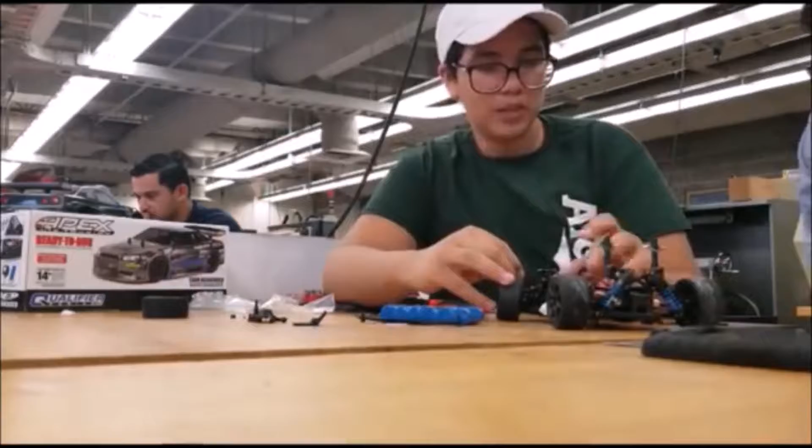Hello, our team composed of Melanie Martinez, Kevin Martinez, and Martin Galicia got the task to design a car using the 3D software Creo Parametric. To complete the project, we went through three main stages: reverse engineering, where we disassembled a physical car that was given to us; the analysis, where we identified the purpose for all the pieces; and the design of the final 3D car.

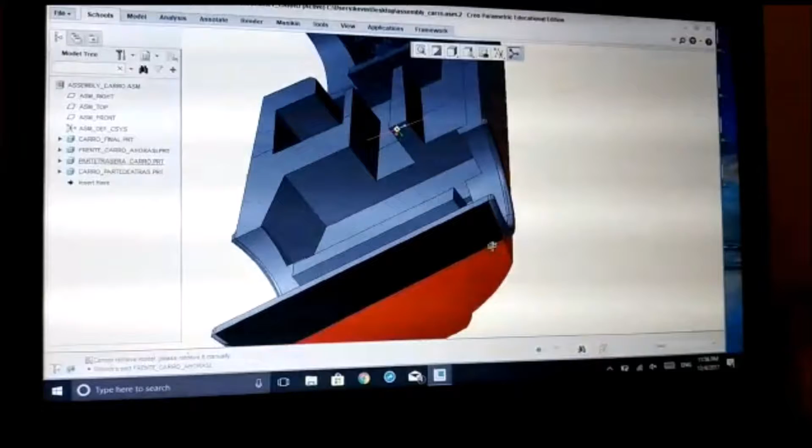This was a challenging project since we went through many obstacles, but in the end we overcame them and developed various skills. The purpose of this project was to design a body for a radio control car that was provided. This new body should be based on the way Local Motors designed the Strati, which was the first 3D printed car to be fully functional.

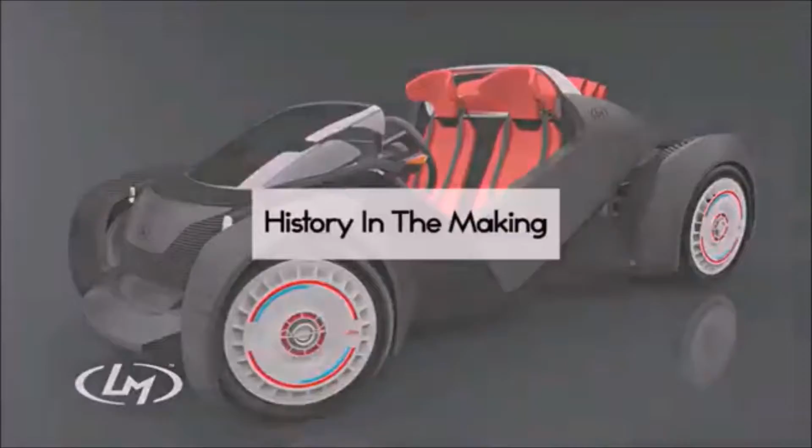Sticking to the concept, we designed a body that could hold all the components without the need of a chassis to hold everything in place. The design was later sectioned in order to be 3D printed, as the dimensions were too big for the printers that we had available.

Reverse engineering is the process in which a product is disassembled in order to understand its components and the way it works, in order to solve an issue or just improve the product. We approached this by disassembling the car starting with the rear side to finish with the front.

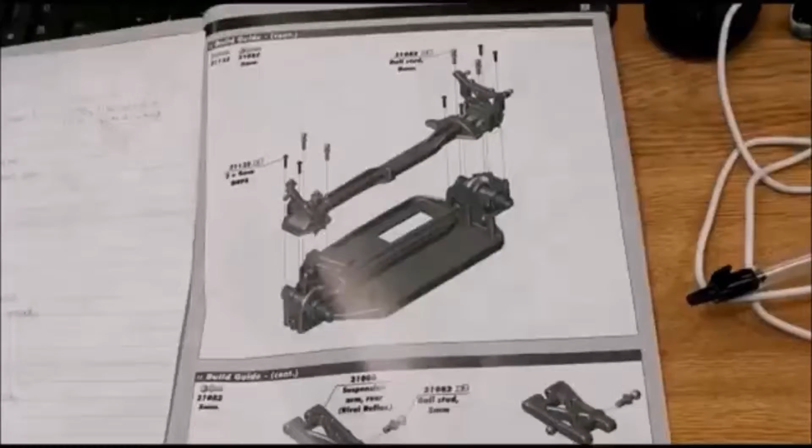We measured all pieces using a vernier caliper and divided them so every member could do a 3D design of it. Once we had all measurements, we analyzed each piece to determine their function and if we needed them for our final design.

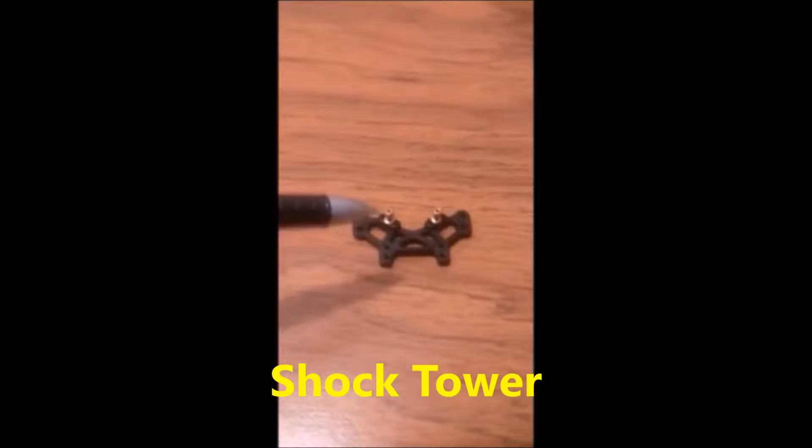The shock tower's function is to support the components of the transmission in place. This piece was designed in order to hold most of the transmission's components, as well as to hold a body mount that was later on used to secure the cover of the car.

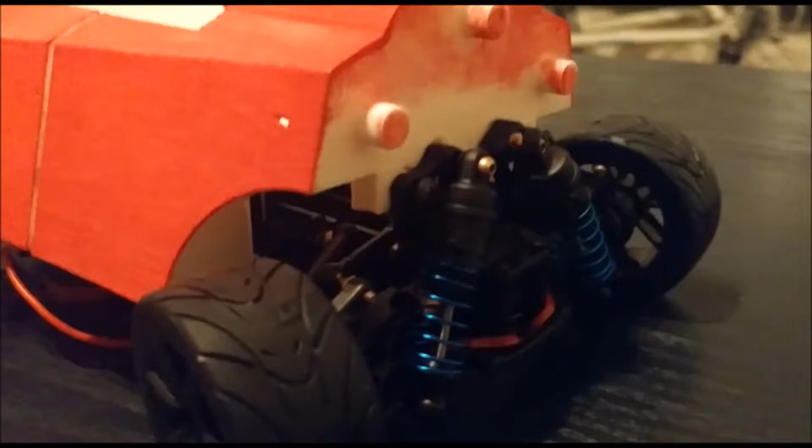As we redesigned the cover, we realized that this piece would be the key to hold all the components into our new cover design. This is why we used this piece as a reference by creating a cutout in Creo Parametric in order to place the holes needed to screw the piece into the body.

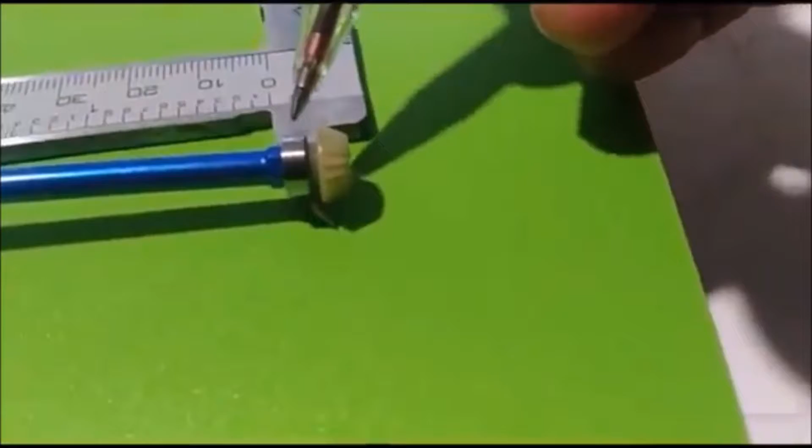The shaft is the piece in charge of giving the mobility to both the frontal and rear suspension. This piece contains a set of gears and bearings that connect directly into the motor and then into the differential. Due to these gears, the impulse needed to move the car is created.

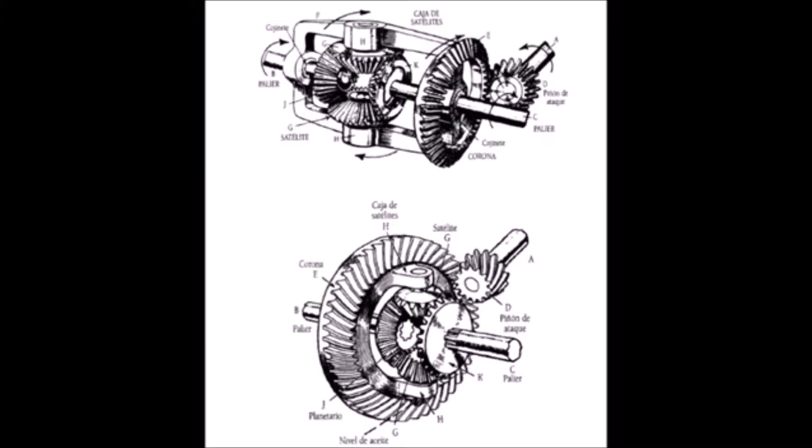The differential is a device that splits the engine torque two ways, allowing each output to spin at a different speed. The differential is found on all modern cars and trucks, and also in many all-wheel drive vehicles. These all-wheel drive vehicles need a differential between each set of drive wheels, and they need one between the front and the back wheels as well, because the front wheels travel a different distance through a turn than the rear wheels.

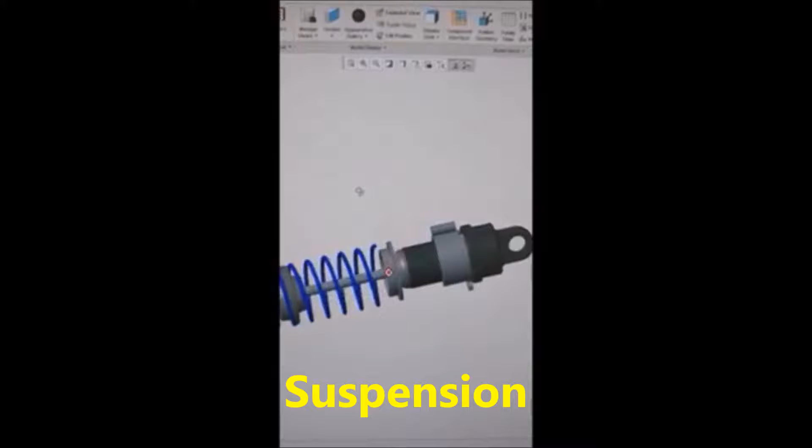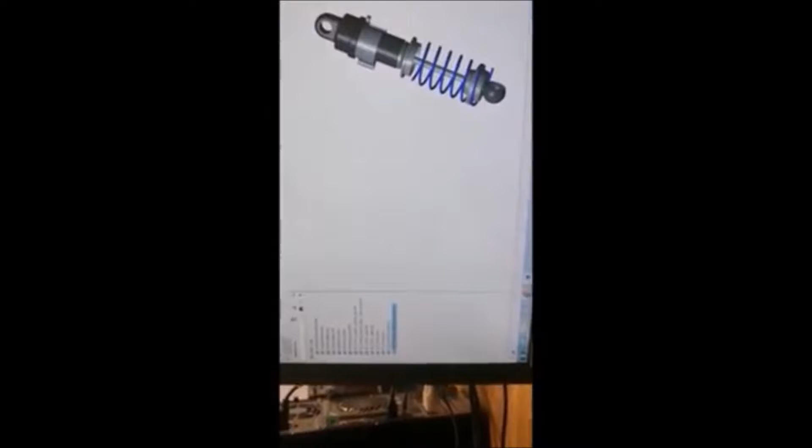The suspension is a crucial part of any car. It helps the car to keep the equilibrium once in movement and gives it stability when turning. The suspension is composed of different parts such as the spring, which makes it possible for the suspension to contract and expand once the car passes through uneven roads.

It also has the lower spring retainer, which prevents the spring from separating. The suspension contains a piston and special shock fluid to help it move. All of these pieces are essential and they must stay in the final design.

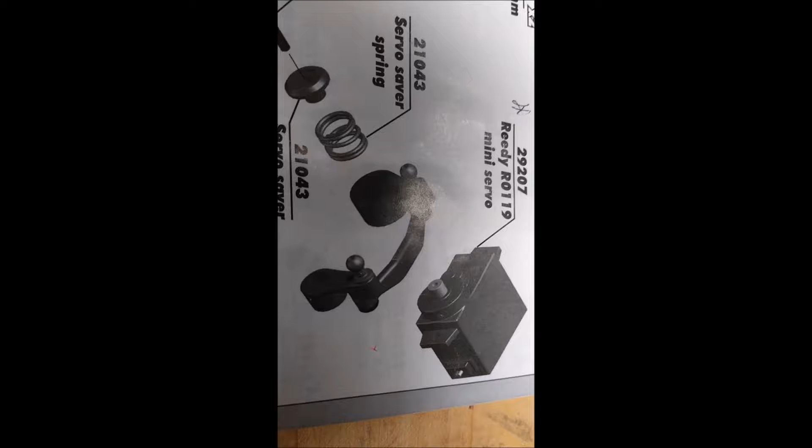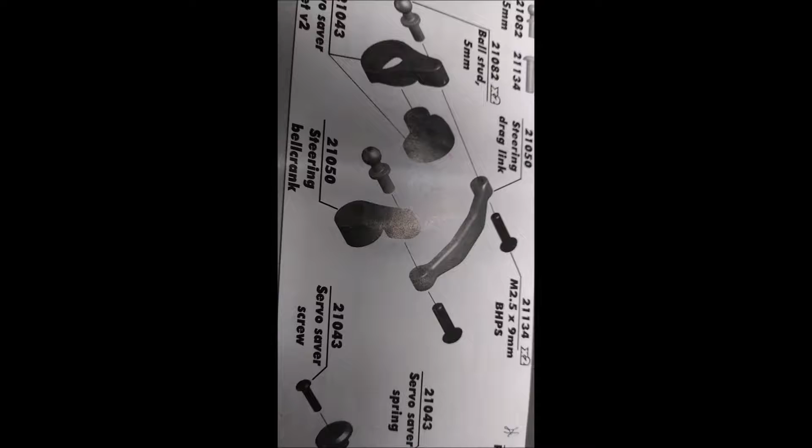The servo increases the steering response of the Apex car. It is designed to create a 180 degree movement. This creates the steering movement of the wheels by using a dog bone to connect the servo and the transmission. To maintain the original functionality of the part, the servo was used in the design of our car.

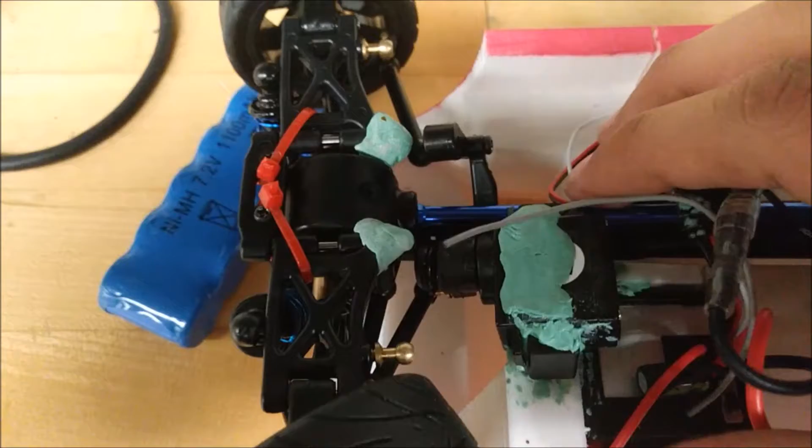The servo used in the car was designed as a smaller scale steering mechanism. It covers the same function as in a real car. The design of it was to be similar to the real one, in a cheap and resistant presentation.

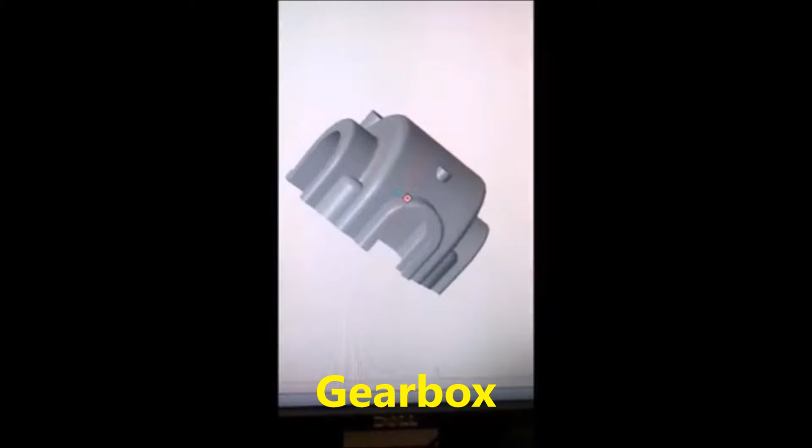The gearbox protects the differential and the gears of the shaft. In a real car the function is the same. It protects the gears, which are selected by a system of rods and levers operated by the gear lever.

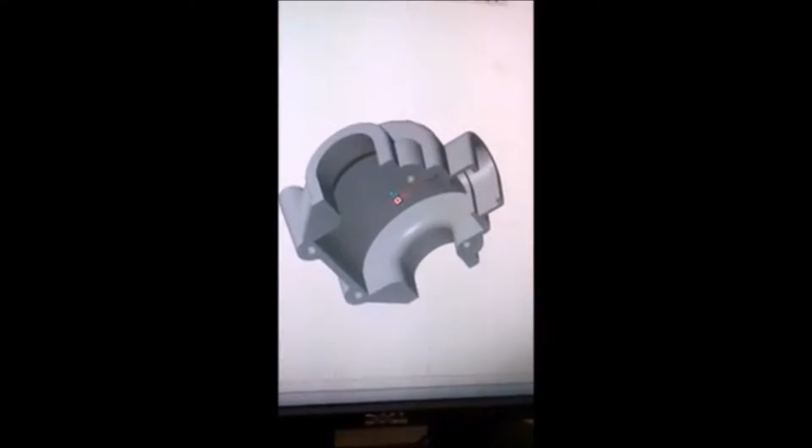Due to the components inside the gearbox, the speed and torque move from a rotating power source to another device.

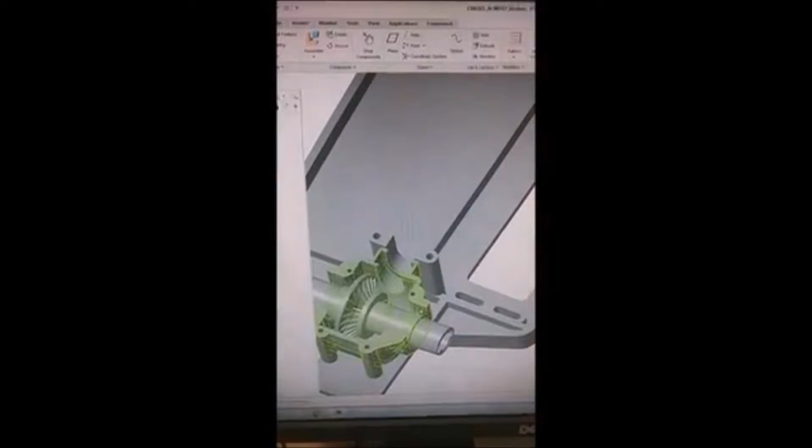The chassis is a big platform used to hold all the pieces inside the car. It is big enough to hold the battery and the servo, as well as the shaft, gearboxes, and the electric wiring. Since our design is made from cutouts on the bottom, the chassis will not be needed. Therefore, its 3D design can be skipped.

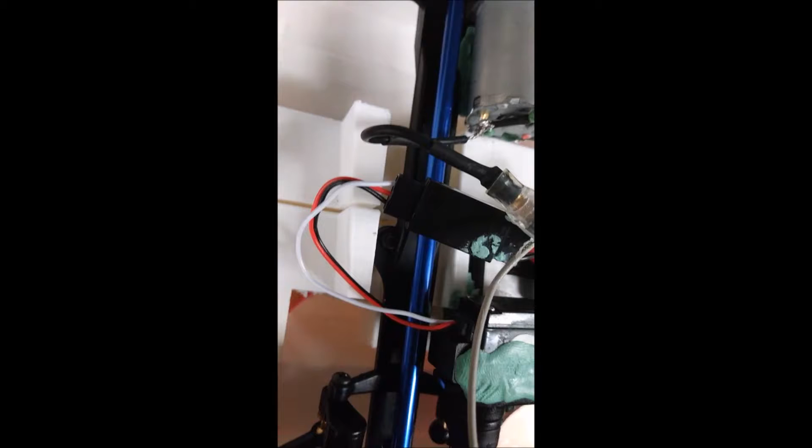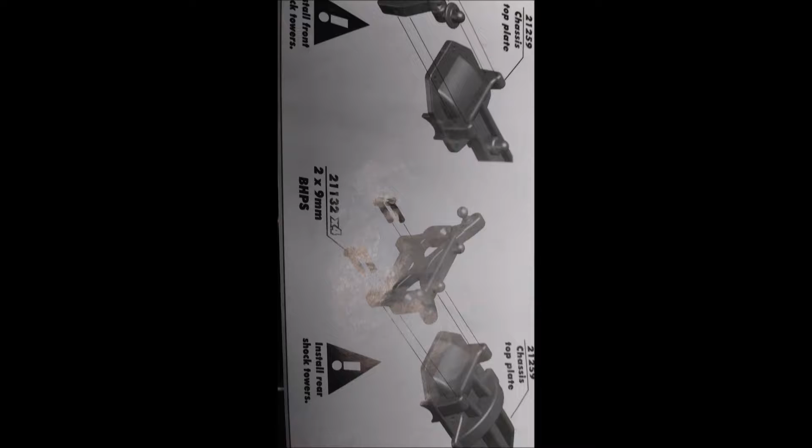The chassis top plate is the component in charge of protecting the most important systems of our Apex car. These systems are the shaft, the differentials, and the motor. In addition to its protection purpose, this component is used to attach the shock towers and the gearbox into an assembly that was later on screwed into our Apex body.

During the 3D printing of our project, we faced some challenges which occurred naturally. The 3D printers available for use presented some issues when loading or printing the filament. We became familiar with those problems and looked for ways to fix them, giving us more experience when using 3D printers. Another issue we faced is that the ground cable connected to the motor broke, which made us have to solder it back.

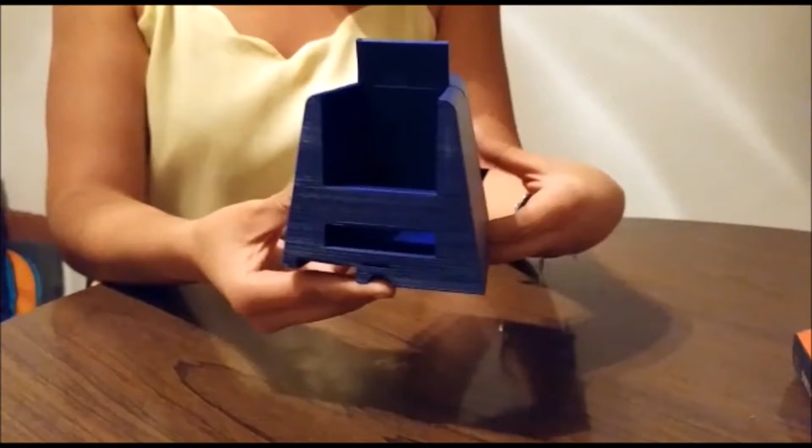The first designs we made were far from the desired one, meaning that we had to correct them and print them again. This design was the first body printed. This design was not created in the most efficient way. For instance, the design did not include an appropriate shape, and the cuts were not big enough to include the mechanisms used in the Apex car. Of the new versions printed, the material and time were reduced from 7 hours to 5 hours.

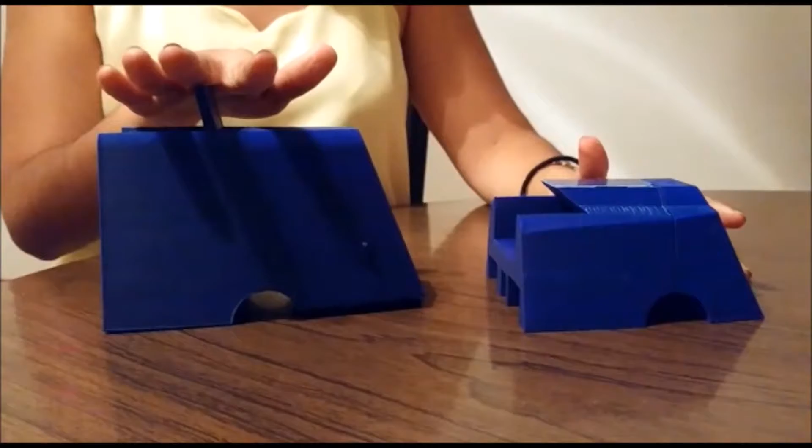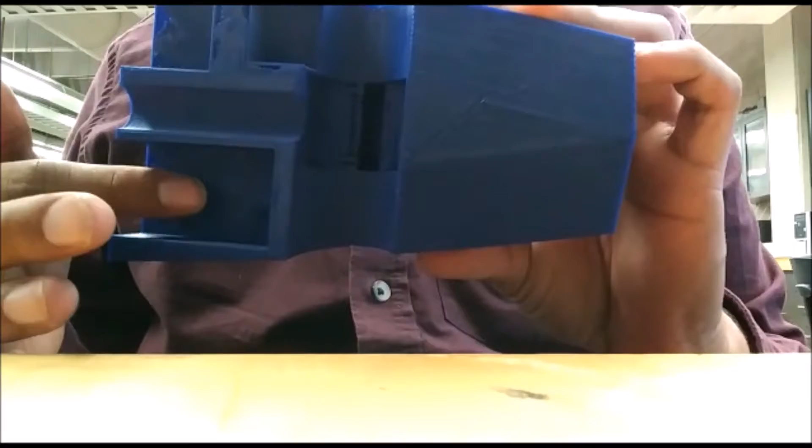On the second try, we started to reduce the height of our model so we could save printing time. We also made the compartments for the components bigger so they could fit. What we did not take into consideration was the part in the middle, since nothing will fit in there.

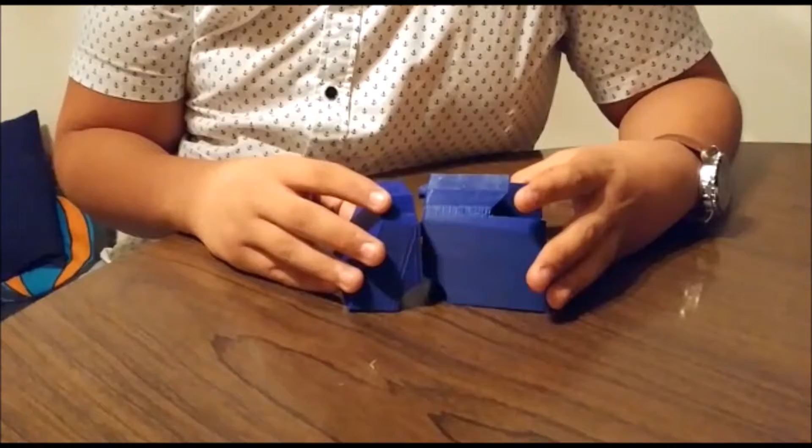For our third trial, we decided to come up with a new design for our Apex car. We decided to make a cut in the middle of these parts in order to be able to assemble the components here by screwing the shock tower in, as well as making the holes a little bit bigger to make sure the components will fit in.

In addition, we decided to add these shafts and holes here in order to assemble these two pieces, but a mistake was made. As we were designing in Creo, we gave the same diameter to both shaft and hole, but we were not counting on the tolerance we should have given to the printing. So in this case, even though the design had the same diameter, the actual piece didn't fit in.

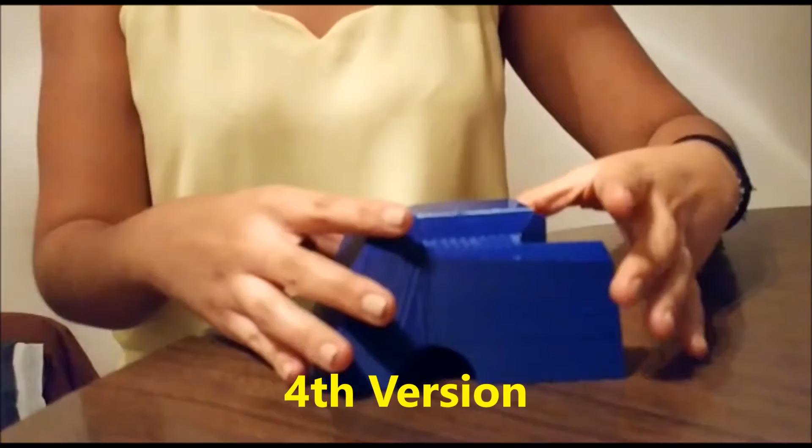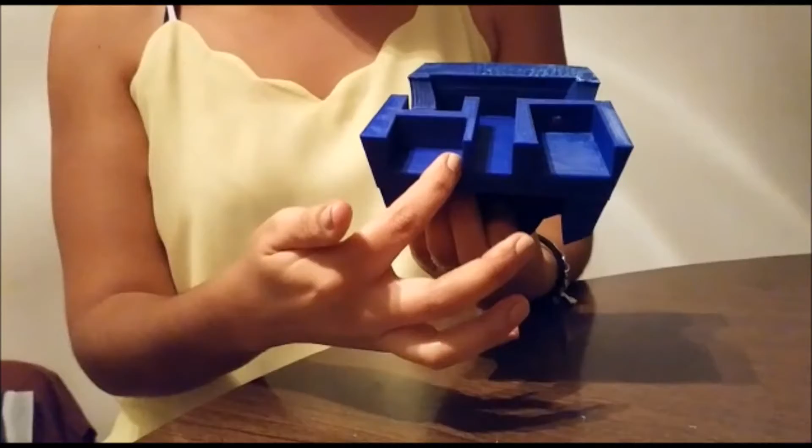Fourth version printed. The new modifications of this version were to change the diameter of the shafts in order to secure the assembly of both pieces. The cuts were made deeper to reduce the time and material used. We also made this cut bigger to assure the suspension will fit. To be assured that the cut for the shock tower worked, we made the empty spaces bigger so the electric components could fit better. However, the shafts are still bigger than the holes, making it impossible for them to fit.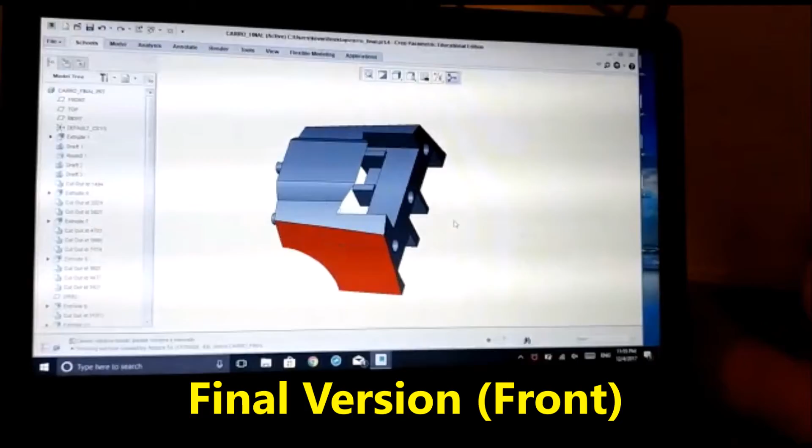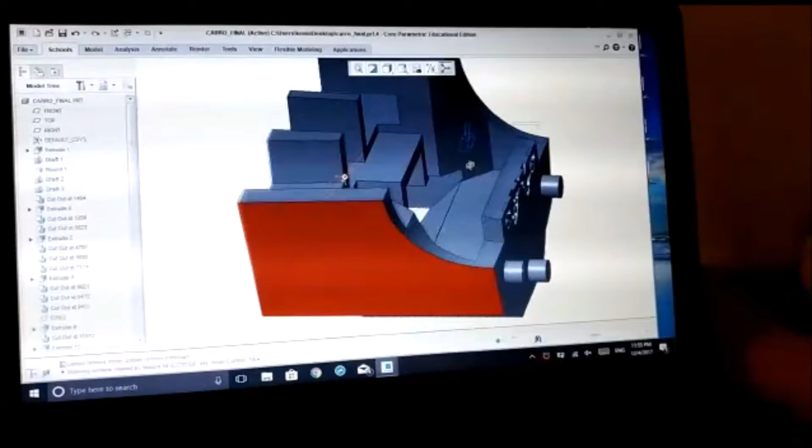For our last trial, we decided to make the middle part hollow as well as the diameter of the tire holes a little bit bigger to assure that all the components will fit. In addition to that, we decided to change the filament used to print. Instead of continuing to use ABS, we changed to PLA. Lastly, we changed the infill percentage to a higher number in order to have a higher quality piece.

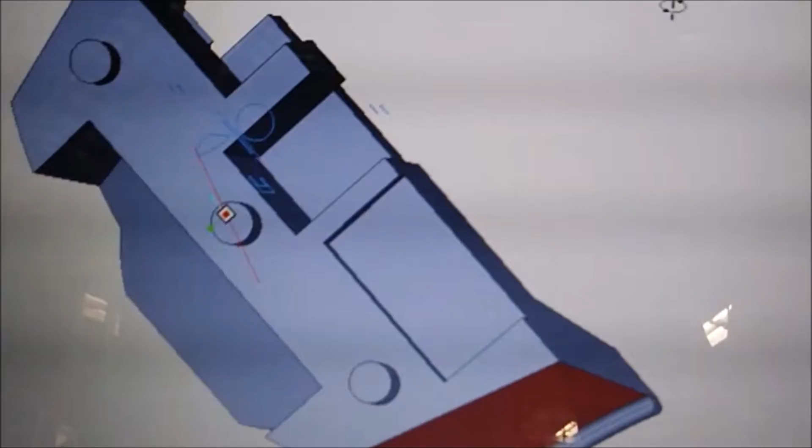We decided to make the rear part following the design from the front part, adding a place where the shock tower could be screwed in order to secure all the mechanisms. We decided to add multiple holes to make sure the shock tower will fit.